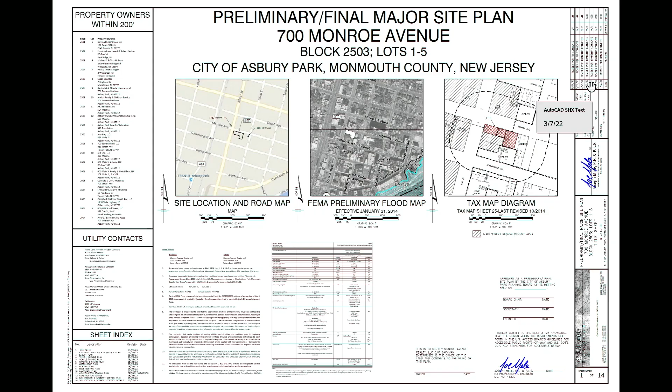Certainly, it's a preliminary and final major site plan set of engineering plans, prepared by Mid-Atlantic Engineering Partners, 700 Monroe Avenue, Block 2503, lots 1 through 5, a 14-sheet site plan set. The original date is January 14th, 2022, and the plans are last revised August 28th, 2023. That'll be marked as A11 for identification.

Joe, can you please go through the plans and highlight those revisions made subsequent to the last hearing? Sorry, just getting used to this laptop here. Oh, with that, yes, okay.

Okay, so as was generally introduced at the beginning of this presentation, should I go through the existing conditions at all? Sure. Okay, thanks, it's been a little while. So to refresh, and a lot of familiar faces here, I was at a prior planning board meeting but had no need to testify, so I recognize a few of the faces here. In general, the site is an amendment, as you know, to a prior application.

The site's located on the southeast corner of Monroe and Main Street. You can see the site highlighted on the cover sheet of the site plan application package. It is a corner lot, and it's located in the Main Street redevelopment area, in the community shopping zone.

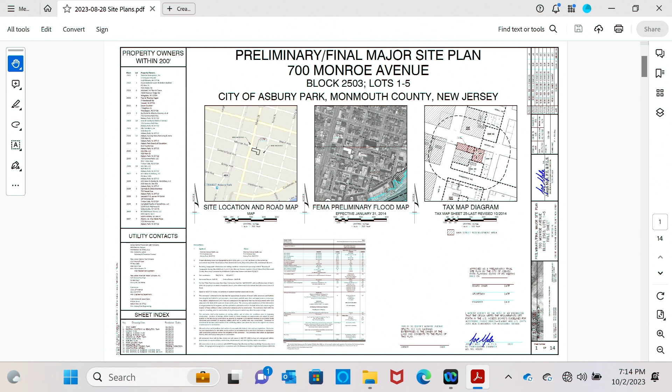Monroe is a two-way with parking on both sides, and Main is also a two-way with parking on both sides and a dedicated bike lane in each direction.

The site is predominantly already improved with various site features like an existing building. It has paved areas, concrete areas, and a small area of lawn. This is the existing conditions and demolition plan. The site is pretty much cleared of improvements except for the building, and there are paved areas. There are 3 curb cuts along Monroe, and 1 large curb cut on Main Street. In our proposed testimony, after it's all said and done, the application will have only 1 curb cut, and it'll be pretty far away from the intersection of Main Street, out towards the right side of the plan.

Before you go ahead, did we receive these site plans? Yes, were they part of our package? Okay, I didn't get this version. Okay, go ahead. Did you need me to repeat anything? No, is that just okay? Go ahead.

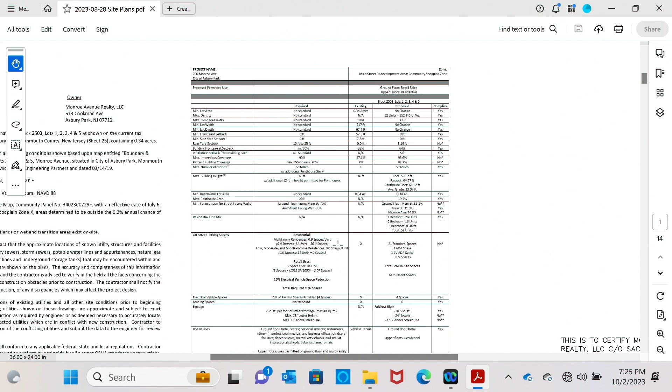It also goes through the off-street parking space calculations, where the number of residential units triggers a requirement for parking, and the commercial triggers a requirement for parking. The required number of parking spaces we calculated to be 36, but I think your planner calculated it to be 37. I think I have a typo carried over from the previous report. I believe the total is 39.

Then you get the 10% reduction. So it would be 36? 6 EV spaces. No, the total required number is 39, but then you reduce it by 3.9 because it's a 10% reduction, so it would go down to 36 as a requirement.

It's a very strange calculation, almost like there's an EV credit. Do you apply the credit on the spaces you're proposing, or to the requirement? A lot of people I'm seeing apply it to the requirement, so they knock down by 10%. If you take 37 and take 10%, it's 3.7, round up to 4, so 37 minus 4 becomes 33 as the requirement.

It sounds right, I remember talking about that - it's very convoluted. The requirement is 39, but with the EV credit it gets knocked down. 10% of 39 rounds up to 4, so 39 minus 4 is 35. The way I would do it is 39 minus 3.9, get an answer, and then do your rounding.

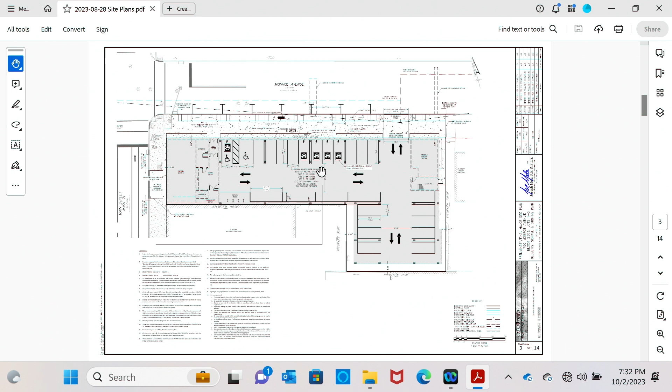So I do want to point out on the maneuvering, we did have to, because we reduced the building, reduce the drive aisle by just a foot. So in the prior plan, it was 22 and a half feet wide in this area. This area stayed the same, still 24, complies. Prior plan at 21 and a half, now we have... prior plan at 22 and a half, now we have 21 and a half. So we had to squeeze that aisle a little bit as well, but that's because the building shrunk.

Yeah, but you didn't narrow that width of that part of the building, right? Oh, we did. Why would you do that? The setbacks are in other areas, right? So like from going south to north, it's still the same footprint, no?

What about the L? No, you could see here, we provide that 3-foot setback. It's not dimensioned. This one foot, or that 0, indicates the overhang. So that gray part is not up against, that's not on your lot line? Is that the building? The building over the parking area closest to Main Street is at the property line. The south part of the building, is that the property line? Is at the property line. So then they didn't shrink it, right?

So at the ground level, no. And again, you might need the architect to fine tune this, but the upper levels, that's where the footprint has shrunk. But parking hasn't shrunk there, in that dimension. Correct. If you didn't shrink that, why'd you have to shrink beyond this? Well, we have the columns.

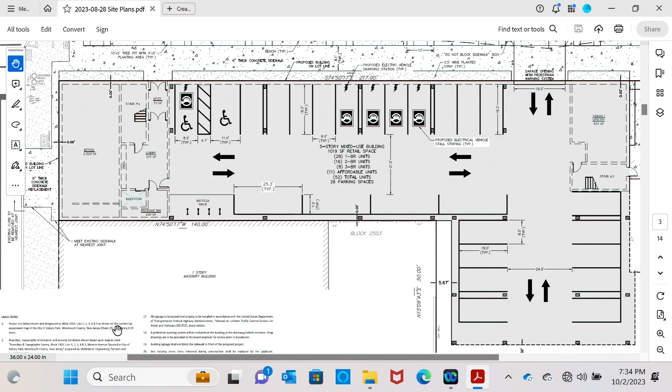Correct. And Jason, is 21 and a half feet enough? It's tight, I mean, they're showing on sheet 4, that's a compact vehicle. And this is the same software everyone uses, so you can just assume you rely on it. That's a compact vehicle, it's shown at 15.25 feet long.

If you go to the next sheet, that is an SUV, I think it's 17.66 feet long. Correct. So you can see how the vehicle moves. So by the modeling software, it works.

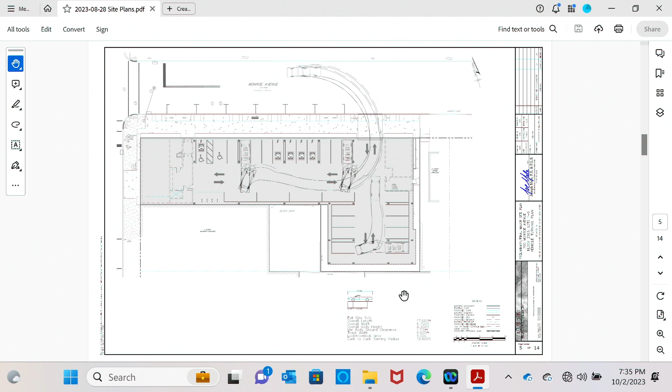But when you go to a standard store at anywhere, USA, the drive aisle, the parking space is usually 18 feet deep, and the drive aisle is usually 24, plus or minus. So you see the difference. So you're down 2.5 feet.

Correct, yeah, and you're correct. I mean, open parking lots, generally, you'll have the 24 and the 18-foot spaces. Parking garages tend to get a little tighter sometimes. There are columns and things of that nature. And the space is just that much more expensive in a parking garage scenario. So they tend to get a little bit tighter.

But I have the same question as before. Maybe the architect can get into this when he gets up, but it looks like there's space, the 22.5 feet that was available before. I don't see why that's not available. There's probably an answer for it. I'm not seeing it. But we can put a pin in that until your architect comes up.

Well, if we push the building out to the column line, obviously the more room, we'd want that as well. We don't want it to be a tough parking lot to maneuver for residents and such. So if we could expand it, we certainly will. We'll have Louis testify.

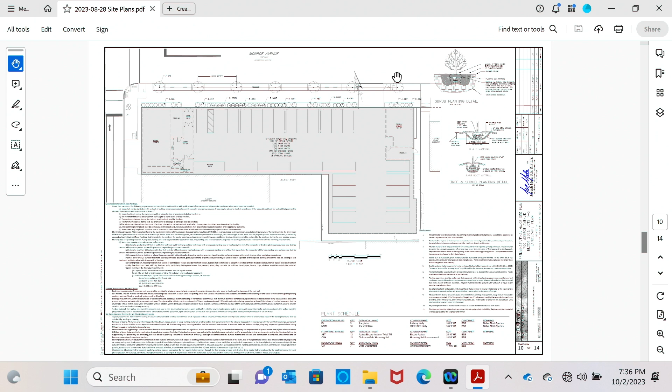So I'll flip over to sheet 10 of the set, which is the street landscaping plan. Generally, you can see here where we have street trees along Monroe, 7 street trees. They're all deciduous street trees that you would expect to have, that comply with the redevelopment plan. We're also proposing 22 evergreen shrubs, 25 flowering shrubs. I think one of the comments from your planner was to provide more landscaping around the perimeter, and we'd certainly be able to accommodate that.

This area is pervious, meaning that we can put plantings around the perimeter of the site through this area, as long as we can have access for, like, for example, to this egress stair and such. It doesn't hinder that type of pedestrian access.

Now, there were comments in the planner's report regarding the Hummingbird summersweet, how it prefers full sun and may not do well in the location on the north side of the building. Any objection with putting an alternative plant as opposed to that Hummingbird plant? We're certainly open to it. I'm not a landscape architect, so I can't testify as an expert, but I have no objection to any recommendation in that regard.

The shrubs that we're proposing are along the building facade on the building side of the sidewalk, and then we have the street trees between the sidewalk and the curb, as you normally would. I'm saying they're just going to be planting in open cuts, not raised planters, right? Oh yeah, no, they're not raised planters or anything, correct. That's correct. Yeah, I would just want to add, if it's swapped out, that it's a native substitute, like a nice native plant.

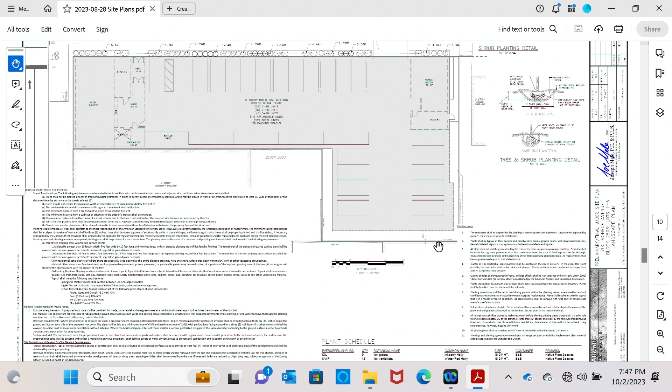But you've got a building wall, the north wall of the building coming off of, I think it's Summerfield. And you've got the back end of this building, the south end of this building, and you've got an alleyway in between. What I'm saying is that's gonna be just a nightmare. This isn't on Summerfield, the back part of that building is not on Summerfield.

Why don't we bring up the cover, the first sheet? It shows the lot. It only goes halfway through, doesn't go straight through. There we go. You're saying it's the building fronting on Summerfield? Yeah, read the back of it.

The north end of that building, well, that building may not go all the way back to the property line either, if there's a requirement. Well, it does today, and it's two stories. You indicate that on your plan, that it does. Yeah, it does today, but I'm saying in future development, if there was something new to come, it might be pulled back from that rear property line.

And 3 feet sounds, and it is tight, but we see plantings in 3-foot areas quite often, as long as they're modest plantings. You're not going to want to put a tree there, or arborvitae or something like that, but something very low, ground cover type shrubs. It's definitely doable.

Whatever the board is inclined with, you want to do a type of ground cover as requested, or river stone, whatever it might be, we're fine with. Do people have a preference, ground cover versus Riverstone?

Yes, I have a preference for Carex pensylvanica. It's just a sedge, a grass. It's low, looks kind of like grass, but it's technically not grass. It's called Carex pensylvanica, and you don't have to mow it. It's evergreen, it has really good roots that absorb water, and it likes shade. It's a spongy type plant. I'm not a fan of Riverstone.

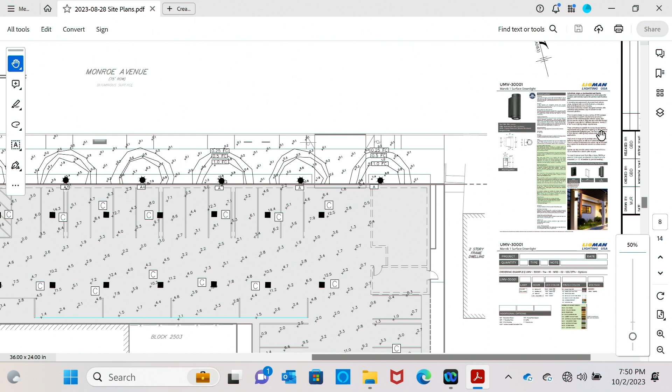What this application is proposing are some wall-mounted fixtures along the face of the building, indicated with these symbols. You have 8 fixtures along Monroe mounted to the building wall, and 3 fixtures mounted on the building wall on Main Street. You can see images of that fixture and some renderings, basically providing sufficient lighting on the sidewalk up to the curb for pedestrian level access.

This site plan lighting plan also shows the soffit lighting in the parking garage. Obviously this is a private parking garage area, but I'm sure the board wants to see that it has adequate lighting for security and such.

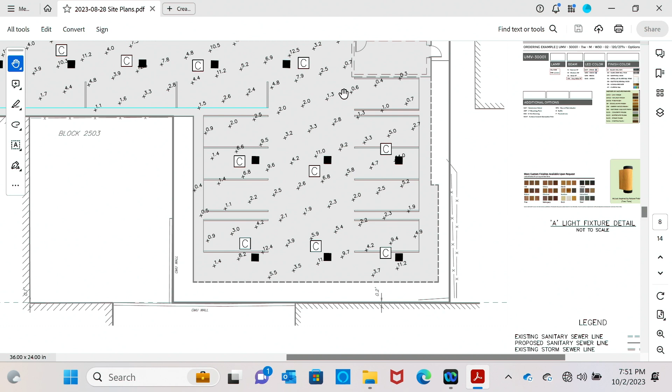One of the concerns that came up was the fact that the perimeter wall was shown as open along the edges. You could see light levels around 3 to 5 on this edge, and by the time you get to the property line, that 5-foot candle may drop down to about 3. So 2 things we did to mitigate that: first, like I was describing earlier, we didn't model this lighting as if there's a 3-foot high wall around the perimeter, so we did that now, and modified the plan to reduce the fixtures, particularly in this area. Where we had 20 fixtures in this parking garage, the new plan shows 16. We have an exhibit that shows 16 that I can bring up.

I'll distribute this now, this is going to be A12 for identification, the revised lighting plan. This is different than what we have, we just updated based upon the report we got and some of the concerns. Is that dated, Andy? I think it's the same revision date. Well, it's actually a new date, it should be noted as a new date, today's date.

We'll distribute this and then resubmit with current date on it. This will be A12 for identification, and I'll bring it up on this exhibit as well, and we'll share this PDF as well.

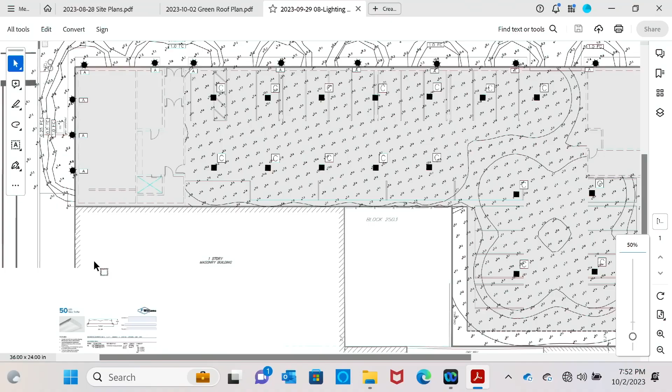So here you can see the exhibit that shows the reduction from 20 soffit lights in the parking garage. I'll zoom in on this edge here that I think you'll be pleased with, the light levels that have been reduced as you approach the property line in the back. You're down to 0.1 foot candles, which is practically undetectable along the edge here, and we did that by just reducing the fixtures.

LEDs are very easy to manipulate. In general, you can provide a certain photo type or light level type and basically steer the lighting in a certain direction. We did that here, so you can see the light levels around the perimeter are much better than what they were before.

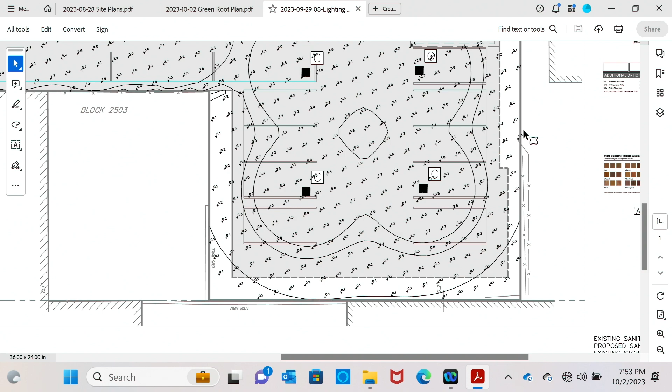Is there any barrier along the property line on the eastern edge? There's the knee wall, but is there anything on the property line? Is there any barrier, like a fence or anything along the property line on the eastern edge?

There's an existing fence that runs up to the front of this house, up to basically the front here, from this front corner to the property line and along the back. We could easily put a fence or gate between our building and that existing fence if that's something needed for security. We might do that anyway, just for our own purposes.

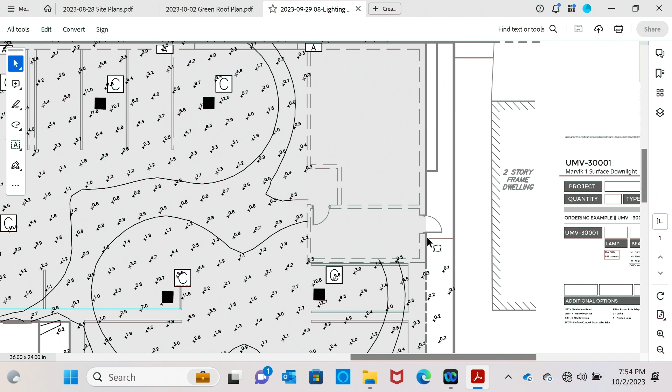It's the neighbor's fence. You should put a fence connecting to that fence, not a fence against the fence. Well, I don't know what you mean by connecting. If they take this down, it's an old house, so you don't want to put two adjacent fences. If they were next to it and took it down, that may require we put up a fence. You may want to ask them - you put your fence out, put a nice fence in.

I think that's something we'd agree to, approaching the neighbor. If they were hesitant or didn't want the new fence and wanted to keep their fence, we can't just go in there and remove it. I had a neighbor one time that had a brick old fence, and he put up a brand new expensive fence right next to it.

We'll talk to the neighbor about replacing that fence, maybe consolidating into one fence. I think you should just secure it too - you don't want anybody walking in from the house. We'll speak with him about that, because that makes sense.

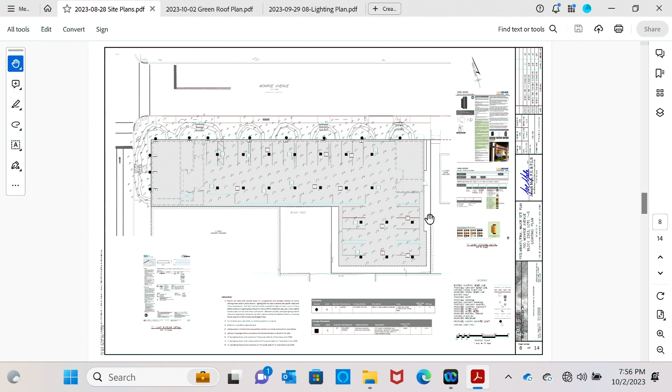Okay, continuing on, this is A12. Jason and I are trying to look at this plan. It does look like there's still a 0.8 and 1.1 - oh, no wait, that's in the building. So the open part where there is no building adjoining, looks like there's a 0.8 foot candle here.

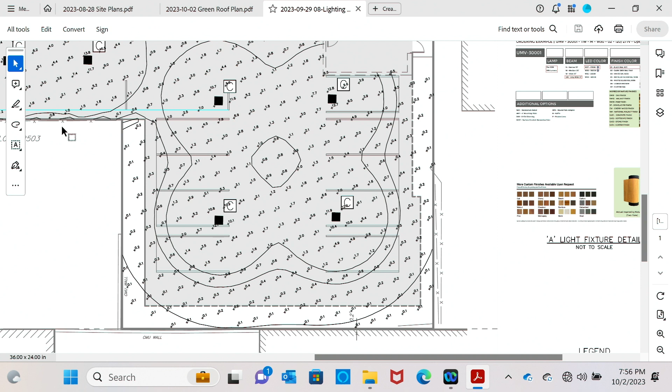At the property line that would still exceed the standard. Over here it's got to be here, this end, because this is the 0.5, so this is going to be 1.2 and that's an 8. There's an 8 inside the building, and there's a one at the property line. So they would still need the exception, but at least it's much improved and it looks like it's conforming all the way around otherwise.

Is that inside the building, inside the garage? No, it's on the piece along the southerly property line where it's open - that lot that fronts on Summerfield. It's the backyard of that lot.

But it's 0.1 right there, correct? It's one, one one. I think you're pointing to this line location right here? Yes. So is that just to the part of the building? Just to the right there, where the one line touches the property line. Is this part of the building open?

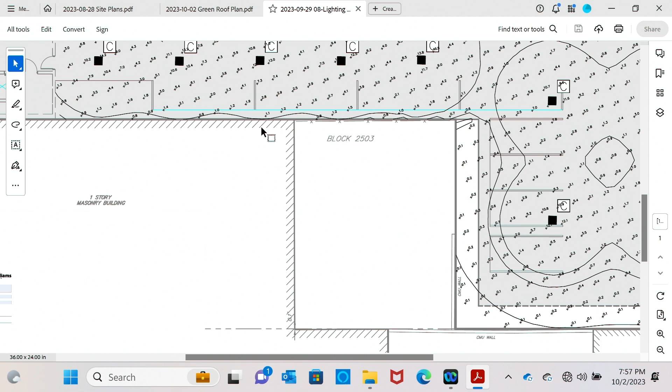Yeah, I think all of the parallel spaces there are open. Oh, I thought you said that was the whole building. We'll get to that with the architecture - it is open. There is a building along that edge, but I think we could reduce that area as well, back down to 0.1, if we just move these fixtures away a little bit, we can make that work.

Continuing on, I'll finish with grading, utilities, and stormwater, which I think I mentioned earlier. All of our utilities and connections are occurring on Monroe - we don't propose any cuts into Main Street. For example, the stormwater connection - I'll flip over to the utility plan.

That's sheet 6 of the site plan set. On the upper left side of the building is where we have the roof drain connection, and that's connecting into the back of a catch basin on Monroe.

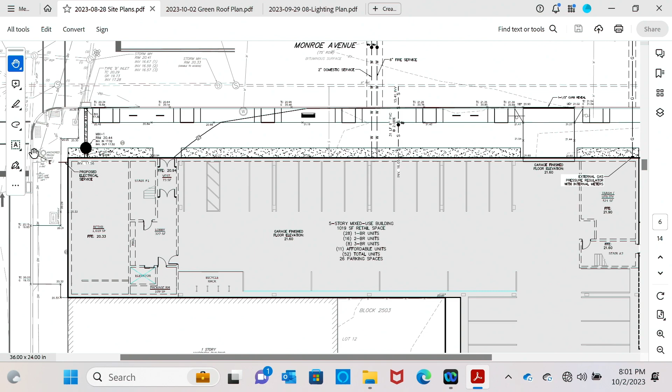Yeah, well, there is overhead and main existing, correct? So the electric service you're getting, are you putting it in or is it already there? Well, there is electric there, but we're putting in a new service. All right, new electric service from the utility—got it.

This is something where, at this point in the design phase, you're not coordinating with the utility company—they're not talking to you at this stage of the game. You have to create a service number with them. You really have to be a lot closer to construction before they give you the details of how they're going to approach the primary service into the building.

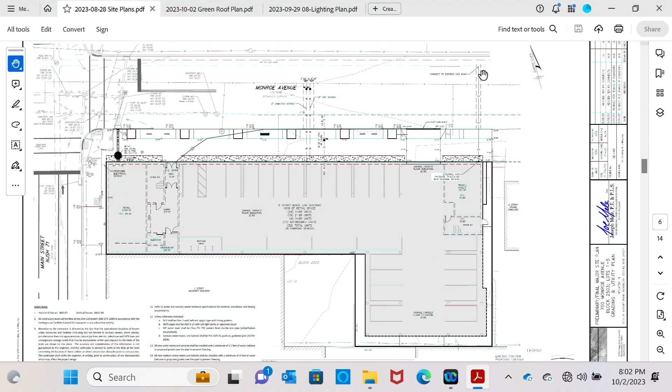What about gas for the building? Is there going to be gas service? We do show gas, but in my understanding of this project, there may not be a need for gas service. It might be a full electric type building. But we do show gas in case it's necessary. That goes also to the utility room on the east side of the building.

We were ready to discuss that for the neighboring property—we would do an easement agreement with them where they could get access for any necessary repairs for their pipe, am I correct? Correct. Okay, so the meters are inside?

That's probably something the architect could speak to, but we could accommodate them inside. And again, if this is the architect's area, is there an expectation of an exterior transformer, or is that going to be inside the building? I doubt there would be a transformer inside the building.

I don't know right now what the need is at that corner, or what's going on there for the transformer. We would have to work that out with the utility company—that's a later discussion, we're pretty early in the game. There's a possibility of an underground transformer or something of that nature, and that's something the utility company would guide us on or really dictate.

Let's just step back a minute to that existing sewer line on the western side, parallel to Main Street, underneath your commercial space. How are you going to handle that? Are you talking about the adjacent property owner?

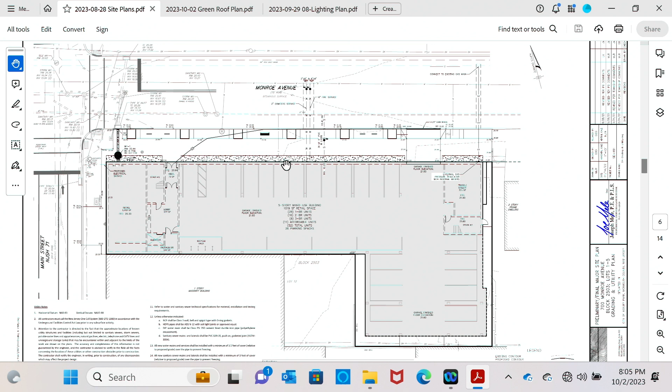The only thing you're really spanning over when you do your new building is this building wall right here. So the footing for the building wall, we'd have to make accommodations to work around that sewer line, if that footing even goes that deep, which it probably won't. Do you know how deep the sewer line is? I don't have that information. But we're talking about a sewer line that's probably a 6 or 8 inch pipe, you could easily bridge over that with a footing.

No, but you have to pave over it with concrete. You're going to have plenty of cover from the parking lot to the sewer, probably 3 or 4 feet of room before you hit that sewer line. Your engineer could even back me up on that. The sewer line that's there today, there's parking there today, there's a building there today, so obviously it's deeper than those facilities.

So we'd have to do a soft dig, find the pipe, and work around it, so it's a construction effort on that end. That's the tire place, right? The adjacent place, this side is the tire place now? Yeah, but I think it's all vacant. Oh, it goes up, but I believe the building runs on top of that, and the adjacent site, I think it's an awning shop or something.

This is all open here, so the building just misses that existing sewer line. So you don't know? Well, it might be a problem when you start constructing, but there's a concrete area there today. So it's obviously below ground here today from this building's sewer, and it has to run underneath the floor of that building, so it has to be deep enough. If we were to put something back here, it's going to be in the same general vertical location.

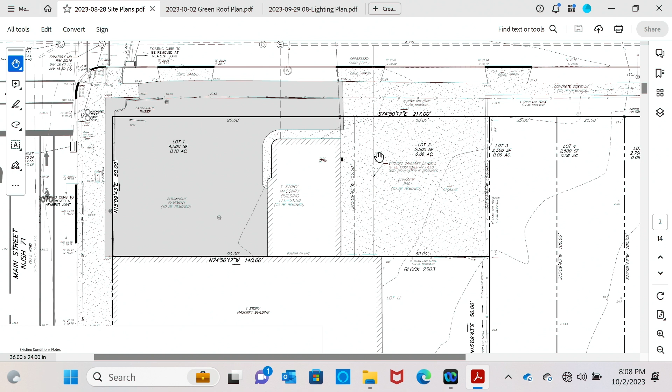We show it on this end of the building, if you can see the plan from your vantage point. This is the back corner, so this is the pipe right here, almost at the corner of the back of that building. That's where we found it to be located. How did you find it? I think we found it by knowing where it comes out of the existing building.

No cleanouts along the way or anything? Not that we saw, so it wasn't easy, I'm sure we'll have to trace it, maybe do a soft dig, a test pit, out by the property line, and map it out. It's the only way to work it out. I understand you have to go around it. Fine, but location-wise, it's a wild guess. I know, that's what you're going through.

Where did I leave off? Stormwater. Do stormwater?

We know that this site is a non-major development, so it's not considered a major development as far as the way the DEP would define this site.

In the site plan package, we have a plan that shows the green roof we're proposing, and that's a substantial change on this plan. You have a green roof requirement, and we meet that requirement. For every square foot of roof, you have to provide 2 gallons of green roof storage, and we comply with that regulation. The required storage based on your requirements is 1,786 cubic feet, and our proposed storage is 1,851 cubic feet, so we exceed the requirement by about 4%.

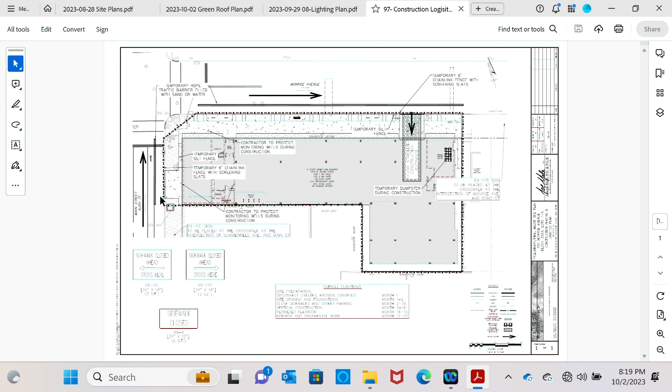Mr. Mayor, just as you're going to do for 8/12, just also this one, I'm assuming you prepared this today. Yes, well, this actually has a date, 9/29/23. It does say 9/29, right? Yes. Is that when it was prepared? That is when it was prepared, yes.

That's 8/13, correct? No, it has a date. Yeah, 9/29/23. So yeah, but that's the date it was prepared. But it's fine, Exhibit A13. Correct.

There's no existing trees? I'm sorry, I thought you said 8/13. What was your question? On the existing plan, there's no existing trees? I just saw a note about existing trees that I don't see. I'm looking at the note that says if trees, I'm looking at your Google map, doesn't look like there's any. Yeah, so the note is just in case. No, there are no trees.

Then if I remember, the site plan provides trees along Monroe, and the city's providing trees on Main Street.

So you closed the sidewalk on Monroe. Is that a major sidewalk to Thurgood Marshall School for the children going to school? Yeah, I believe the city has a crossing guard there, and that's a major sidewalk to the school. What do we do? Well, we can direct them to the other side of the sidewalk, have signage where they have to go to the other side. I think that'd probably be the safest way to do it. Okay, but you are creating a path. There is a path barrier there. Yeah, absolutely, they're protected, and I'd estimate it's probably 6 feet wide, so it's pretty substantial. But if you want to keep them out of the street, you can have signage directing them to the other side.

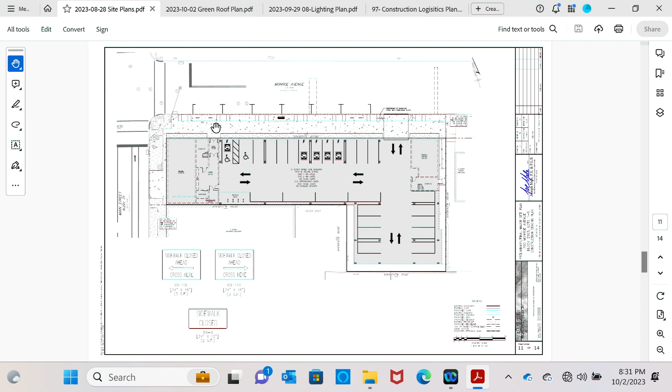29 is the easement, we've gone to an LSRP, number 31. There was also a question about monitor wells, and I missed that in my testimony, I had written it down, but we do have 3 monitor wells on our site. We're not the LSRP, we're not the environmental engineers, but we do know that those 3 monitor wells will remain there after construction, they're going to stay there. They're basically situated on the western side of the site. If you go to the existing conditions plan, you can see them in the background, that's sheet 2 of the plan set.

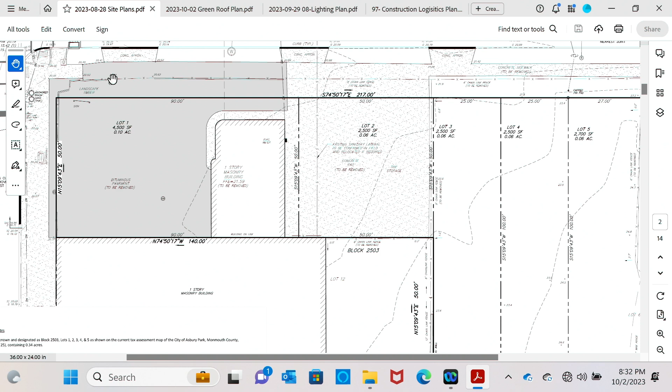One is here on right on the property line of Main Street. One is inward of the site, so it would be in the parking area of the building. Won't be underneath the commercial space or anything, it'll be in the open parking area. And then there's one monitor well out in the sidewalk. They're all going to be protected during construction and remain subsequent to construction.

They're very clear on the phasing plan, if somebody can't find them, on this page. We tried to identify it clearly on the phasing plan.

Continuing on, the additional considerations on page 7 of 10. We've done the lighting analysis, garage level lighting. B, 88 parking stalls are asked to confirm dimensions are compliant. Are they compliant? We'll ensure that they're compliant.

And C is proposed planting mix for the intensive green roof, specified to be for an extensive green roof. We'll accommodate recommendations for what an extensive green roof is as opposed to an intensive green roof. Extensive green roof is basically heavier gauge than an intensive. It has more planting opportunity, so you could put thick, larger plantings, and I think that's what your planner and engineer were alluding to, and we'll certainly accommodate that.

I can't specify the species, but that's the opposite. Extensive is less. No, I think extensive is... I'm sorry, my brain always flips it, but extensive is the thinner profile, intensive is deeper. Okay, you have the intensive on your plan. We have intensive, that's what I meant. So we have intensive, we could accommodate the thicker plantings.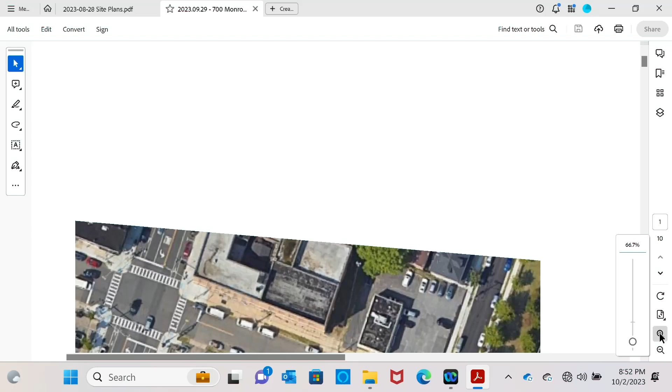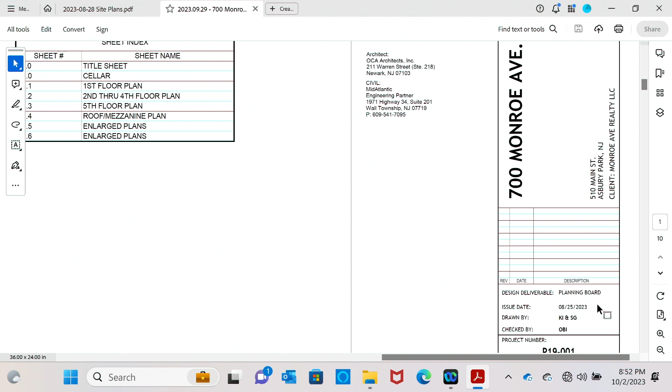Obi, you've had an opportunity to make revisions to the plans subsequent to the last hearing on this matter, am I correct? Yes. You're going to pull those plans up on the screen? Yes. I'm going to pull those up and mark them as 814. If you can give me a last revision date on that, we can pull those up. I bring 8/25/2023. Taking a look at what's marked as 814 for identification, what we're going to have you do is go through the plans and highlight what is on them and how they differ from the previous set of plans submitted.

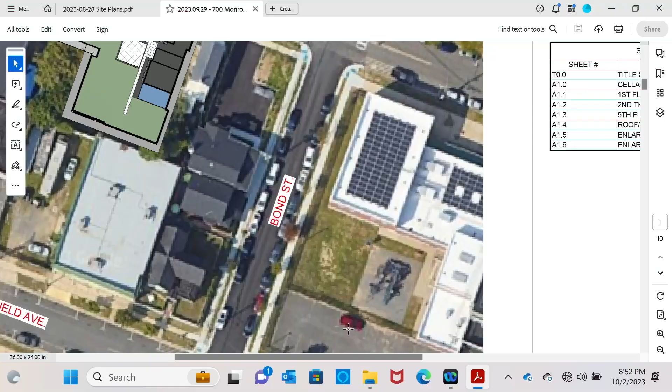Thank you very much for this opportunity to present to you. We were here before, and based on some of the comments raised by your professionals, we were able to improve on the floor plans. Earlier, one of the plans we presented had an issue with windows in some of the units. What we are presenting now addresses that, whereby we have a corridor between the units so that we're able to provide windows on all the units. So that's a big plus to the process.

In the bedrooms, betterment. And also, as testified earlier, the number of units was also reduced. So this is what was submitted as part of it. Basically, the project layout has already been explained in terms of having the main street as well as Monroe Ave.

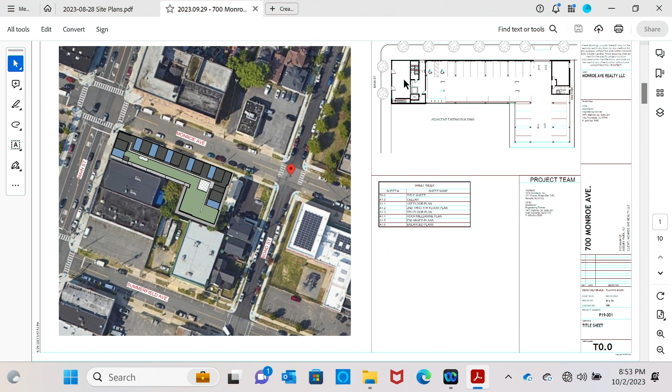What is new now is because we've reduced the size of the building, we're also trying to increase the pervious area. So we reduced the size of the building, and doing that forced us to create a basement, which will allow us to have a basement under the retail, as well as another little one just for the building itself. So this is just showing you what that layout is.

But in the parking area, it's still on grade, am I correct? Yeah, the parking area is still on grade. This is what I was talking about in terms of the basement — it's a cellar that allows the commercial space to have places to store things. From one of those spaces, you can go down and get into the space. It's completely separated from the other side of that wall, which would be exclusively for the residential, for them to store items in that space.

So that's what we did. Why did you have to create this cellar? Because we needed space - we have stairs here, and everything is very tight when you come into the lobby, in terms of storing some stuff for maintenance.

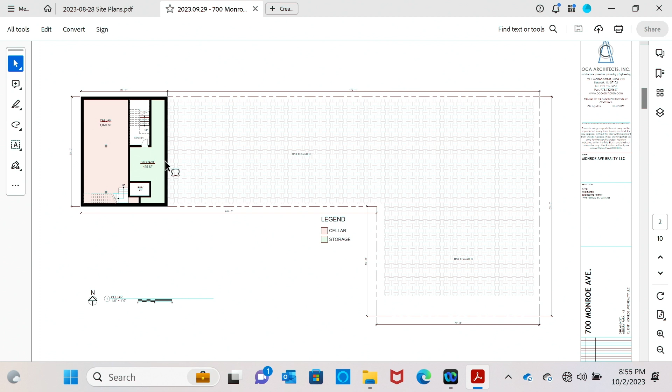Was this space here before, in the parking area? No, it wasn't there before. So, not that it's an issue, but why did you have to create it? Because, based on how the building will function, you need to provide storage spaces for building maintenance, to store things to maintain the building.

You didn't have that before? It wasn't provided, yeah. There were some spaces carved out, and that affected the parking. But once we started making changes to the parking layout to create the 5-foot area around the building that we now have, that squeezed everything down. So before, the retail did not have storage? No, it didn't. So it was for the betterment of the plan.

So that's for the basement. Then on the first floor, before, we used to have the entrance - all this area used to be more towards the middle. But as I indicated at the beginning, some of the comments actually led to the building being better for the site, because right now we're still maintaining the entrance to the building here. Before, we used to have a small lobby and a very small area here.

By this change, we're also introducing a new mechanical trash room area at the corner here, which is a nice sight. That provides us the opportunity to do that. Now you enter the building from here, through 2 sets of doors, and we're providing an area for packages to be stored here. Elevator is here, and from here you can go up to the units. Again, there's a separation between the residential component and the retail - the wall here shows where the retail is.

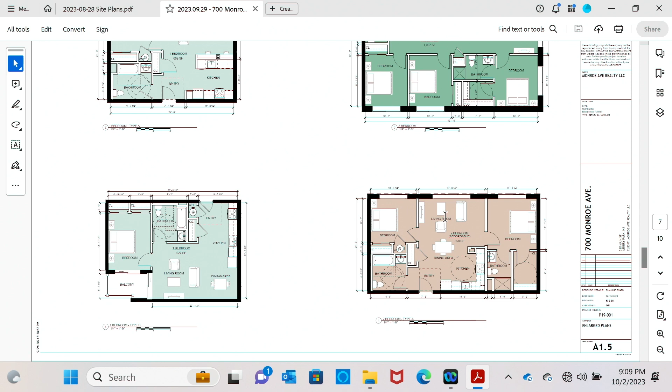So again, you enter from here, the kitchen is here, the bathroom is there. And then this is our typical two bedrooms, bedroom on each side. You come into the unit, and again, everything opens up.

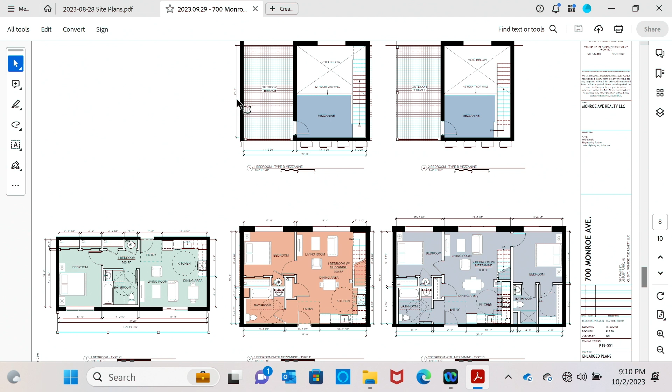There's a window that will be here, and the kitchen is on this side. Again, this addresses the top floor in terms of how you get to it. From this unit, you get on the stair and walk up. As you come up the stair, you'll be here, and you can look down into this area, or go up to the outdoor terrace. So that's the idea of what it is.

So what we've done is just give an idea, because David is gonna present the exterior elevation, but I believe it's better to have a 3D image of what this looks like so you can have a sense of context.

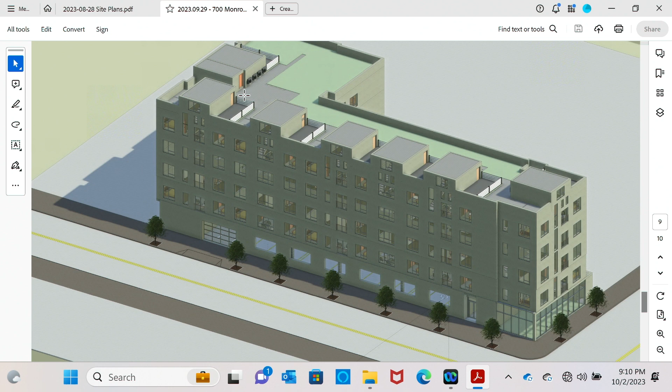For instance, you can see all the bulkheads from this mezzanine area. You can see that mechanical unit is gonna be way back here, and the other one is gonna be in this corner here. This is taking a view from way up, which in reality, if you're on the street, you will not see any of these things happening on top.

The other area is the back area that we just discussed in terms of what the building is doing. So this is that balcony area I was talking about. These are the columns, and this is the low wall that we are planning to put.

Now, what about between that low wall and the building itself that's on top of it? For security purposes, we're going to put something in there? Yes, we're going to explore putting, and I think when you see the elevation, which David has done very nicely, you will see that we provided some grills, some kind of way to protect against that.

But I think this gives a good view of that area, so it's very clear what we are trying to do. So again, there are the balconies here, parking will be down here, and this is the property line, so we're trying to stay away from it, as you can see in all this area here. And then we have the windows, and again, this would be an outdoor space for this unit here. This unit has its own, so that's all special.

Again, this whole area will be the green roof that we are proposing to provide. Green intensive, yeah, intensive, I should use that word, intensive roof that we are proposing to provide.

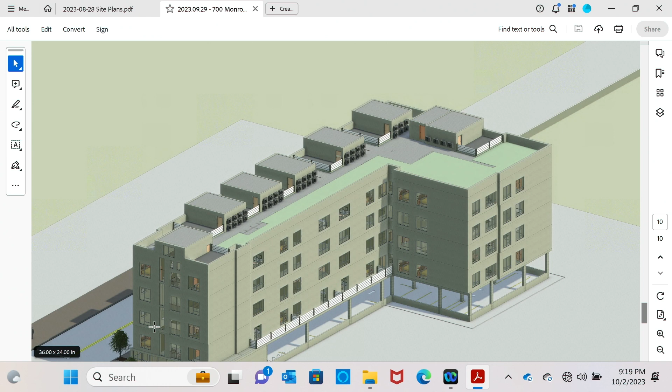Because the building, I think, at its corners, at those L corners, they go out. I think the corner units jut out, the building units, right? No, well, I don't know. Where is it? Does that not show them jutting out there? Oh, you mean from the easterly side? Yeah, okay, I see, there's a jog in the building we put in, we pushed it in. Yeah, so it's 5.2 feet at its widest, and 3.2 feet at those jut-outs. That's kind of close to somebody who has a single-family home on the other side.

Yeah, at this point we are on the second through fourth floor up. Remember, the first level is where the parking is, so the single family home area is there. When you go up, we pulled this back also because per code, there's a percent opening requirement we have to be aware of. I'm looking at sheet A1.2, right?

So you have measurements, this is the second through fourth floor, right? When I see at the widest part it says 5 feet 2 inches, is that to the property line of the second floor? Yes. So where is it now? What's the width over there on the first floor?

The parking lot is there, yeah. You just said on the easterly edge of the building, does the second floor set back? Does the second through fourth floor set back? Look at A1.1, it's consistent with A1.2. Look, you can see the exterior wall right there that follows.

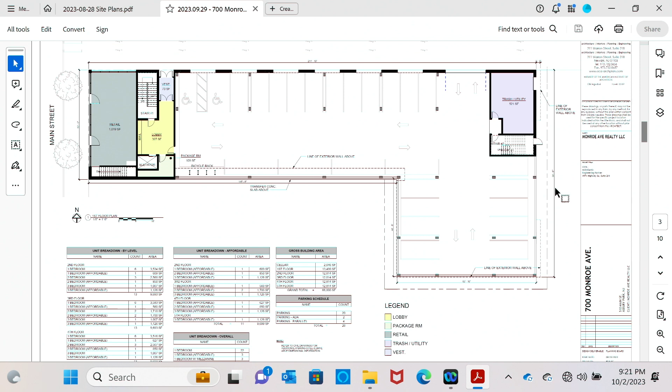Actually, it seems like the second floor... the ground floor is more the parking, and the second through fourth floor at the northeast corner. It says line of exterior wall up above. I'm just going by your measurements in A1.2. It says 5 feet 2 inches from the second floor. So is the first floor less than 5 feet 2? Or is it the same, or is it bigger? You gotta tell me.

Let me zoom in, up in the northeast corner, right there where it says line of exterior wall above. So here, that's the part that sticks out more. Yes, and then it goes back. The rest is in line, 3 feet 2 inches, am I correct? Yes, in that area, but on the first floor it's back. It's back to here, 5 feet 2 inches. I understand, but the second through fourth floor now has a great view right into the windows, right into the person's backyard, so it's even closer. It's a little bit more.

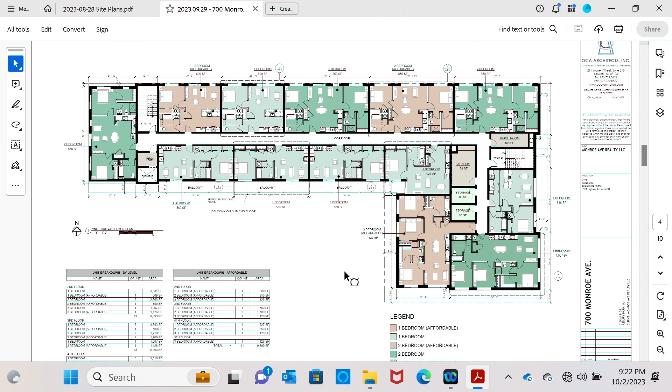So that's what we are dealing with. No, that's correct. Otherwise you lose all that parking, you lose your storage room, you push the entire building in, and you're gonna basically lose all your parking - you're not gonna be able to build the building to accommodate the housing that's needed. That's like the same story with every project, for a variance.

So with that said... wait, before you go, let's go through - question about where are the utility meters? Hold on, they're going to be in the storage, the trash/utility area. So they will all be interior?

Yes, that's what we are looking at now. And again, based on our discussion, once we get going and talk to the utility company, we will see what makes sense. Maybe we can put something in the basement area, we can work out with them what the best scenario is.

Okay, so on the parking level you have the mechanical room, and you're thinking that you're gonna have the trash enclosure there as well? Yes, that's the plan. So what's the square footage of that room? It's about 521 square foot. And if you have utilities in there, meters in there, how is that gonna impact the area that's gonna be utilized for trash? Well, the plan is that the trash is gonna be coming down in this corner here, because we have a chute. So everything comes down, it's compacted, and then some of it will be stored here.

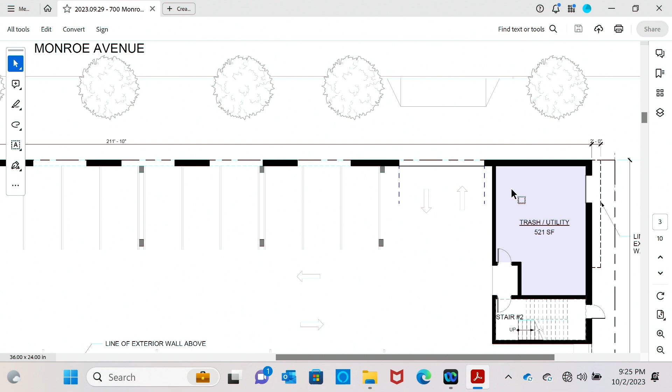Again, we're gonna talk to the utility company and the engineer to figure out bringing some utilities into this area, or also going into the basement area, which provides us another opportunity to use some of these spaces, depending on where the utility company may say they would like to come in from. In that case, the cellar will be impacted. Is there a concern with the minimum square footage of that trash enclosure if there's meters in there as well?

You're asking me, the utility company's gonna have to weigh in on that. Well, but there's a minimum square footage required for the trash room, correct? Yes.

The meters are up on the wall, so that doesn't take up a lot of the floor space. If you look at the plan of the floors above, there's a 108 square foot trash room on each floor, lined up over that space next to the stairs on the ground floor.

We haven't gotten a whole lot of testimony about how the trash room works, but they're gonna fill it up from the chute. There's building management, they're gonna fill the totes. The problem is that in most of these we usually have private pickup. They've testified it's gonna be public pickup, so they may not get the frequency they need based on the area they have for storage. So that's the one potential disconnect.

And recycling is going in there too? Sure, yeah. So how does the recycling work, does it go down the chute? Yeah, we're gonna provide 2 chutes, but we'll coordinate the final layout with the engineer as well as the owner. Maybe, since we have the trash room big enough, we put a receptacle for recycling and just throw the normal trash down the chute. That's something that needs to be worked out with building maintenance.

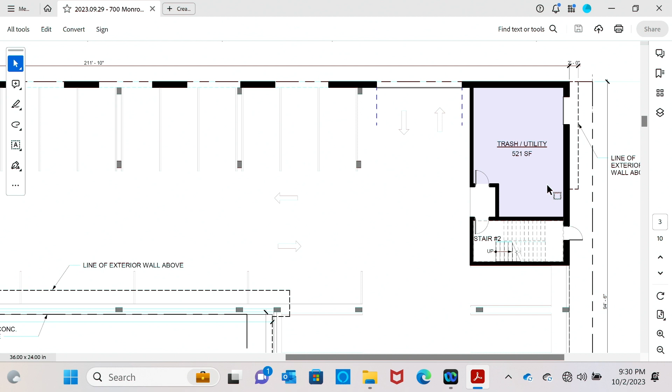There are different types that are made, they're not small, but we are gonna research it and work it out with the manufacturer. Keep in mind, they own numerous residential buildings here. They have a lot of experience dealing with recycling, trash, making sure the electrical meters are where they have to be. The building has to accommodate that, and they have experience making sure the trash is handled appropriately.

If necessary, we can bring up additional testimony just to go through it. But the area that we have is more than sufficient.

Any other questions for this witness?

So I do have a question about how the green roof works, because the architectural plans say to look at the civil drawings, and the civil drawings don't have those design components. So you're saying this back corner, the southeast corner of the green roof, somehow is draining to the northwest corner of the building, to go down some imaginary pipe to go outside to that manhole? Is that right?

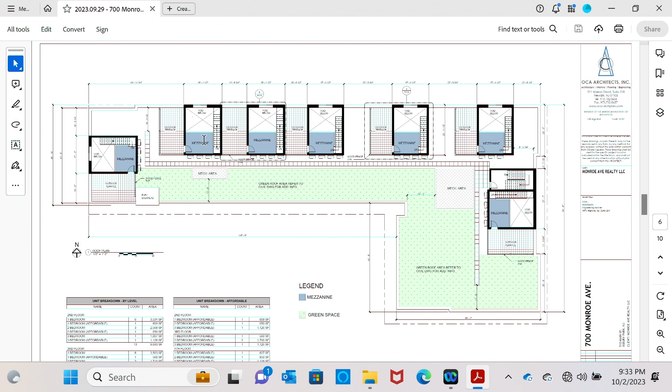Are you accommodating that? Yeah, that will probably be something that will be worked out during design in terms of collecting all the water and how you exit the building. Where all the piping is gonna go, that's all your construction drawings. The plumbing engineer will be involved with that decision making, whether we pick them up here and run it out, and then collect everything underneath the building and then run to one corner.

Those are the things you do similar during design. All your plumbing, that's your construction drawings, have all that detail.

I just want to tie in the discussion we had earlier with the engineer about the width of the drive aisle and the parking.

Is that foot gone? Can that foot be recovered? Can that drive aisle be 22 and a half feet wide instead of 21 and a half? Let's go back to... not that I don't believe you... 81.1. Yeah, let me see.

Before, this parking was right on here. We know we have to put columns here, we have to construct for it, so I don't think we can regain that 12 inches. That's where the foot went. Yeah, it's part of it.

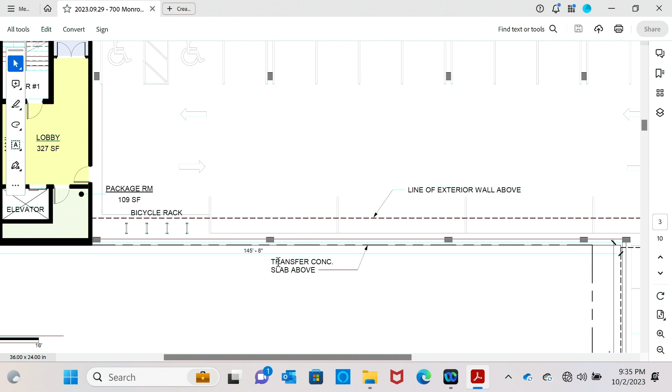Was it in the last iteration where there were no columns? There were columns, but it wasn't properly taken into consideration that now we're looking at it, we know it's going to be carrying four stories of building, so we've got to make provisions for it. So the drive aisle will be 21 and a half. So the drawings before didn't have the correct column? No, the columns were there, but it wasn't quite accurate, so we've now talked to the structural engineer some more to make sure that's covered as part of the plan.

So I just want to go back to the drainage. So there will not be any exterior roof scuppers or downspouts, drainage structures on the outside of the building? Yes, we can work all that in within the units, on the exterior wall. That's what we wanted to know.

Are you going to discuss the CCH report or someone else? The CCH report basically deals with the exterior design of the building, and that'll be covered by a different witness. How about who's going to testify about the affordable units, the locations? The planner.

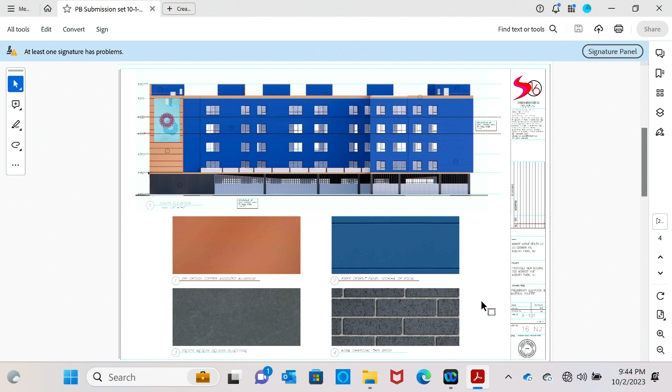The color scheme was derived by having to have something colorful, something a little bit different, and complementary colors. These are colors that you would see at the Jersey Shore—in the sand, in sunsets, in the old wood buildings, the old wood clapboard buildings, anything with silver, with cedar.

Oh, right here, it's coming along. Donna has it. Well, so I just wanted to— Oh, so it's there. Yeah, yeah, right. It's two different blues, so we're going complementary colors, opposite ends of the color wheel.

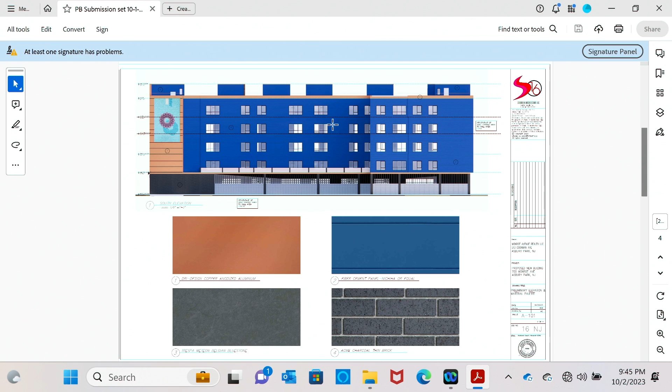The pop-ups, the mezzanines, created a really good articulation of the roof line, so that it's not just a flat roof, okay? The copper is used as a band across the entire top of the parapet. As you can see, it circles the building, right? And you can see how it ties everything in. It's also at the base, the top of the base, above the brick.

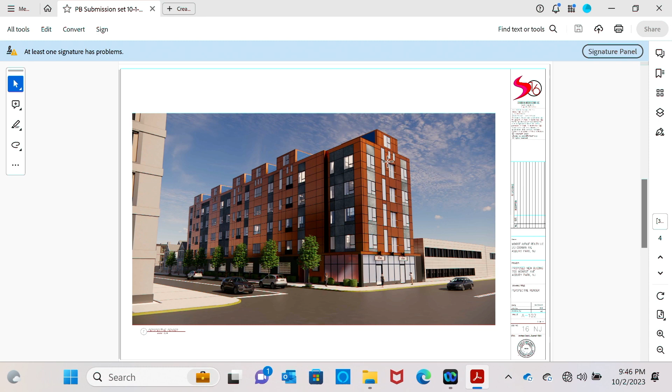The corner, the way Obi designed the floor plan, is not in the same plane, so it's recessed slightly, right? So that the corner stands out a little bit the way the plan was designed, and you can see how this pops in on the south side.

We also addressed this area as a place for a public artwork if necessary, and I did use the image from City Hall as a placeholder because I thought it was pretty cool. We just put it there to indicate that if there's going to be a public artwork, that would be a place for it. And that would go before the Arts Commission for that, am I correct? Yes. Or is that an option, or is that definitely part of the application? That's part of the application.

Well, these buildings that we show adjacent are not the buildings that are there. They're there to show scale, right, because those are existing two-story buildings. And this building right here, certainly not the building that exists, is again shown at that height for scale.

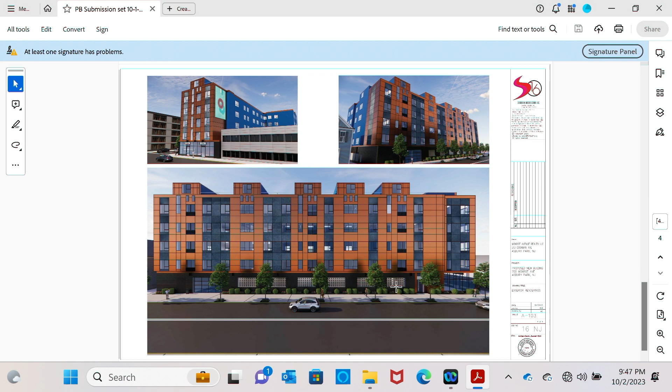You can see that we have the openings into the garage along the street frontage of Monroe, protected with, at least at this point, a perforated metal panel. The previous version had some kind of a metal screen that was almost a tree shape. But that's subject to further design and consideration, and we're open to suggestion on that, correct? Absolutely. In terms of signage—

Let me blow this up a little bit. Depending on the light, look at it, like that. Yeah, and you turn it— there it is. Yep.

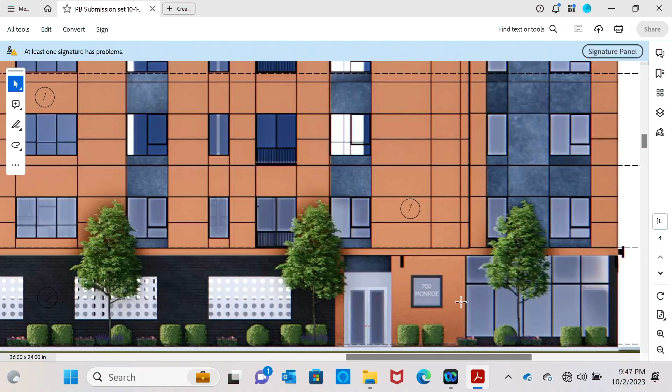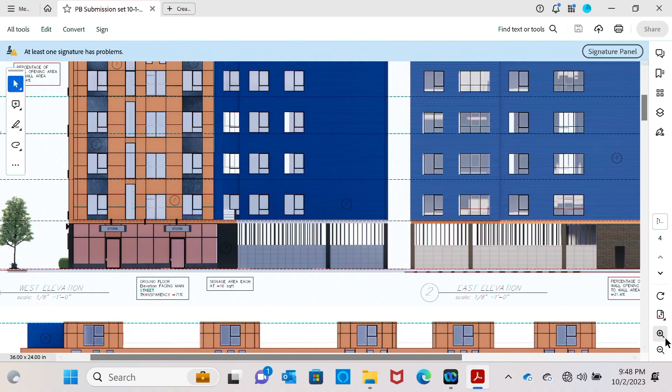The signage on the retail side has 2 individual signs over each retail store, each one being 16 square feet attached to the storefront. They're subject to further design, but they could be very thin, and could be either LED or neon, illuminated or not, depending on recommendations. We're fine either way. We've shown the lighting sconces per the engineering plan.

Is that temporary, that it's gonna be 2 stores or 1 store? Well, it's set up to be subdividable, whether it be 2 or 1.

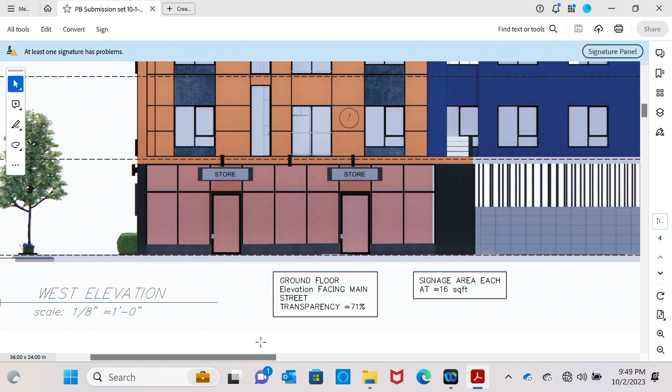Now, there was a comment with regard to the knee wall around the bottom of the building. We have shown the knee wall, so it's no longer floor to ceiling glass, because it'll go right down to the slab or to the sidewalk, so we have shown the knee wall. The bulkhead, is that the same thing? I'm sorry, what's the height gonna be? 19 inches.

The plans that you're reviewing, how many pages are there? There's 4. Only 4? Yeah. I don't see these on the plans that we have.

Above the knee wall, you might have already said this, is it bars? No, it's glass. And is that clear glass? It's clear glass. Retail, but you're talking about the parking. He's talking about the retail. Well, we're talking about the bulkhead/knee wall at the retail. I'm jumping around, I'm sorry. It's okay, I haven't gotten to that part yet. We're here, not here yet.

So the bulkhead is just a solid panel, opaque, whatever - is it gonna be glass or aluminum? No, the bulkhead could be either aluminum or masonry, finished with the same thin brick to wrap around. Okay, I guess I'm asking, what is it going to be? So what are we proposing? Don't give us that a-la-carte choice, tell us what it is. Okay, well, it'll be part of the storefront material, aluminum.

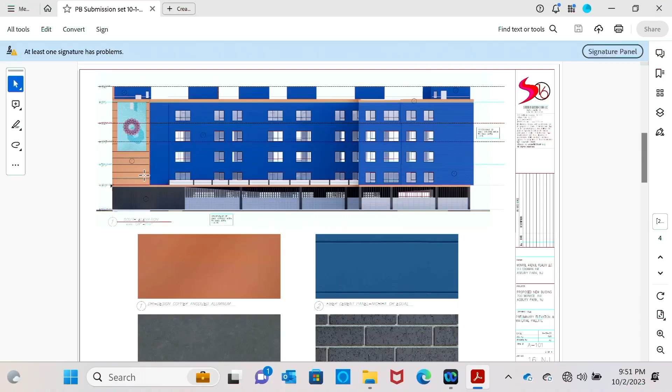Well, I mean, you can build it up, but we can buy storefront material with bulkhead panels. Well, what is the material on the knee wall? We're proposing right now that we could just get the storefront built and fabricated with that knee wall, and you said it's gonna be aluminum. 19 inches. Okay.

And what's the material? Is it gonna be aluminum, like the storefront? Okay, consistent with other storefronts? Yes. However, your rendering shows it as something else, correct? Right, but if we do it as a bronze anodized aluminum, it will tie into the brick. Okay, so it's going to be anodized aluminum. Yes. And so the rendering is not correct. Well, color-wise, it's similar.

I thought you just told me it's gonna be bronze, anodized aluminum. There's no color specified. Right, it's very close in color to the brick.

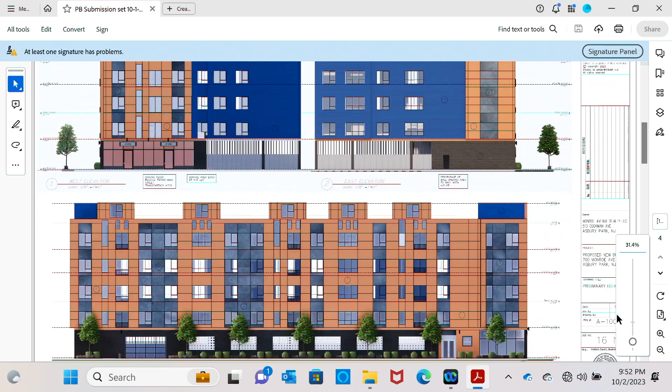Why don't you increase the size of that so we can see it? Your rendering shows it to be a black knee wall. And I assume that on page... Yeah, so when you look at it, you focus in, it's not black. Right, when you look at bronze anodized aluminum, it has more of that - it's not quite black.

Okay, here's a sample you gave us of the aluminum. Right, but that's a different... We're talking about a different part of the building. Different aluminum. So you're saying that's a different part of the building.

Wait, is this the main body of the building, right here? That's a different part of the building, the copper part. Okay, what he's talking about is the storefront right now.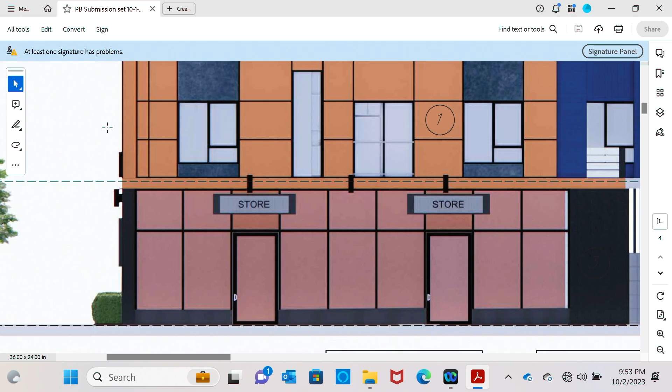We don't have the color scheme for the storefront here on this sheet. It's right here, A101. Normally we'd bring in samples of storefront materials. He's testifying to what the storefront is gonna be. Right, those materials are for the main body of the building.

Which will be here and here. So, your opinion as an architect, what should it be? Do you think it should be the same as that charcoal brick, or close to it, or what?

It's good if you could get it all fabricated as one storefront with the bulkhead and just pop it into the opening, I think that's fine. They're insulated. In your opinion, I think it'll be fine, they're insulated, durable, easy to maintain.

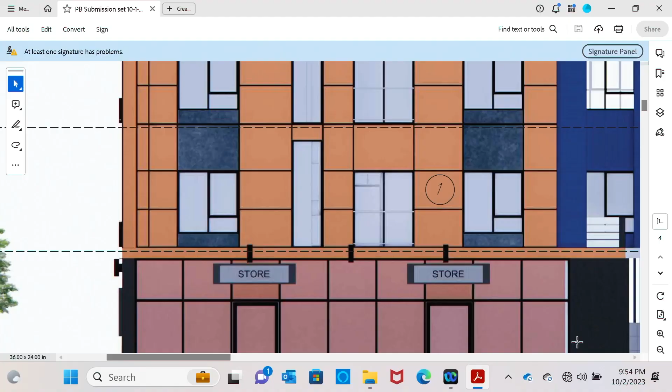Can you just clarify what it says on the back of that sample, the Trespa, not the copper one? An actual slate.

So is it gonna be natural slate or Belgian bluestone? No, it's gonna be Belgian bluestone. Okay, so that should be marked Belgian bluestone. Okay, so that's not the right color. It's very similar. I'm sorry, I thought I brought the bluestone.

But this is the material, am I correct? That's the material, not so much the color. It's definitely Trespa Meteon, not the exact color. My apologies.

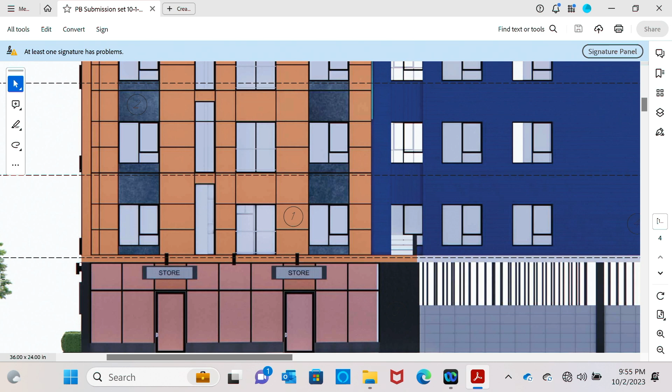And then the copper aluminum, when I'm looking at the elevation drawing, it's basically this brownish body of the building. That's correct. So if you look at the actual rendering, which is on...

In this model, does it keep its color all the time? Yeah, yeah, the anodization process makes it very durable. It's not like a painted finish where you'd see notable wearing over the years.

Or real copper, and actually it turns green. Well, you could actually do natural copper, and there's a process that prevents it from going green and oxidizing. I've seen a courthouse, St. George's, Staten Island, that has copper treated that way. It hasn't worn out or oxidized yet.

Okay, so since we're approaching 10 o'clock, I wonder if it might be good for us, since we're obviously not going to finish this application tonight, to put together a list of things we still need further testimony on and things we need brought back.

I don't know if it's worth giving any preliminary thoughts on this color scheme. I was actually thinking if we want to give preliminary thoughts about the exterior of the building before we do that. Eric, if you want to give some preliminary thoughts, go ahead.